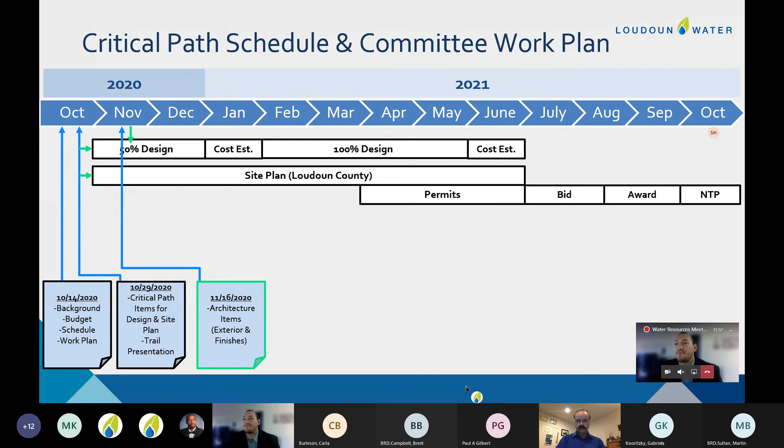And just recapping some committee decisions to date, this is our third meeting solely focused on the Reservoir Park project. At the first meeting in mid-October, we went over some of the budget and established the budget management principle and strategies moving forward.

The goal is to continue trying to bring the cost down wherever we can, without adjusting scope as best as possible. One of the strategies was the use of bid alternatives.

As we move forward pulling together the bid documents, we'll check in with the board on these bid alternatives. This will give us some flexibility after opening bids to make decisions depending on the cost.

At the next meeting, late October, we mainly reviewed some architectural items and opted to move forward with adding that bridge back in, over the small section of the reservoir, and also moving forward with the wood cladding and the stone water table. We'd like to include some bid alternates, just in case the cost comes in too high, giving us an option to bring it back down to the steel columns without the water table.

Stefan, Mr. Koblos has his hand up. Good morning, Stefan. Morning. Just a comment and a question.

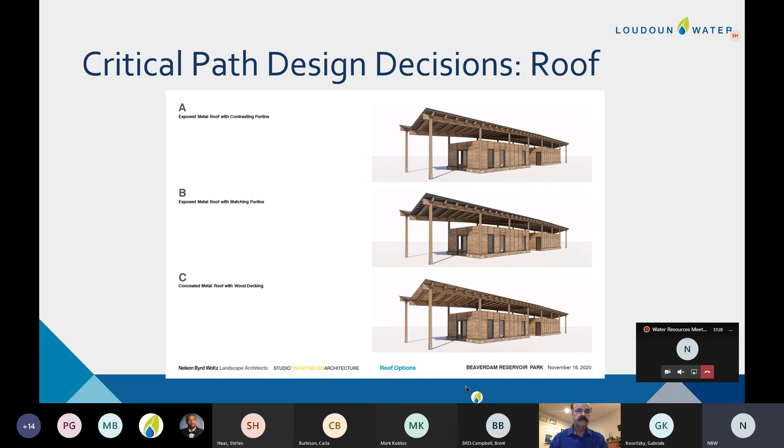Option C uses either a tongue and groove or some other kind of wood decking to completely conceal the underside of the roofing. That gives us the option to either stay with a metal roof or switch to a lower cost EPDM or membrane roof that isn't seen from the bottom or above.

So with that, we'll go to the next slide. So you see option A again - this is the most typical vernacular roof, where you see joists, purlins, and steel all exposed. There's a precedent image off to the left. We'll go to the next slide.

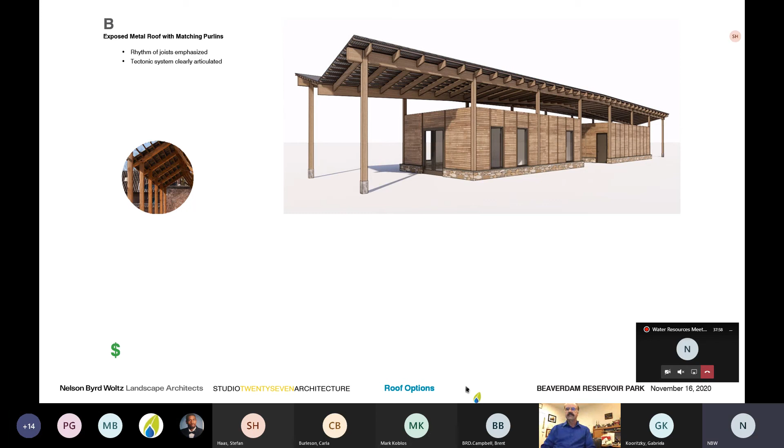Very similar to the first one, just with the purlins, which are what connect the steel roof to the joists, painted. We'll go to the next slide. This is probably the most drastic - it basically eliminates the purlins and replaces them with a wood decking that the roof is then fastened to. Obviously a different look from underneath, and you can see that in the precedent image to the left.

So those are the three slides that focus on the roof. We can circle back through any of these as necessary, but in an effort to keep things moving along, the next three slides look at siding for the volumes themselves.

Evan, I see we have a hand up. I'm not sure if Mr. Campbell had a question. Yes, I was just going to say I can't see any of the slides. I don't know if others can, but they're not on my screen. Paul, can you see the slides now? I can see the slides, plus I have them up on another monitor from the Word docs. I cannot see the slides. I'm able to see the slides. Paul, are you able to see them now? I cannot, but okay, maybe something on my end. We can all see the slides here.

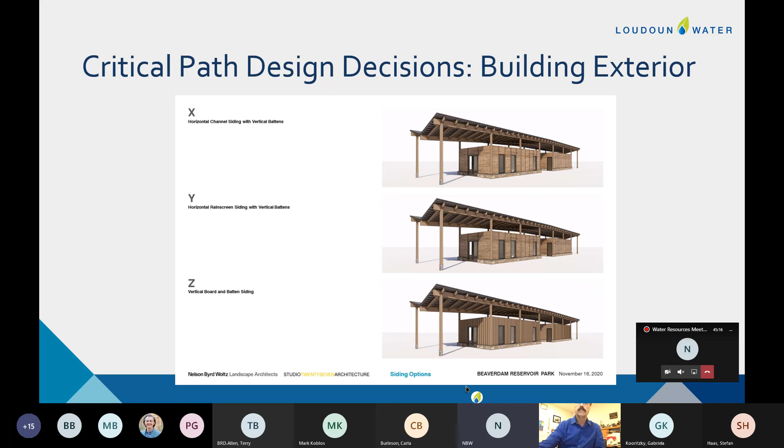If we go to the next slide, you can see, if it's not covered by the window on the bottom right-hand side, there's a section showing traditional framing, batt insulation, sheathing, a vapor barrier, and then the tongue and groove gets fastened directly to that in a very traditional way. We would hold them apart to allow for a little shadow line in between the boards, which you can see in the precedent image, so that it doesn't look monolithic and has some texture. People are probably fairly familiar with traditional tongue and groove.

If we go to the next slide, this is the rain screen option. It would use a similar type of wood, just without the tongue and groove profile. The boards are held away from each other, and there's also an air gap maintained between the exterior of the vapor barrier and the back of the siding. This allows moisture to ventilate, improves the longevity of the siding, and gives you a deeper shadow line between the boards since it's not continuous, giving it more texture. These are pretty traditional and kind of vernacular to the region, especially in smokehouses and corn cribs and things like that, so it's an adaptation of an earlier detail that we bring back.

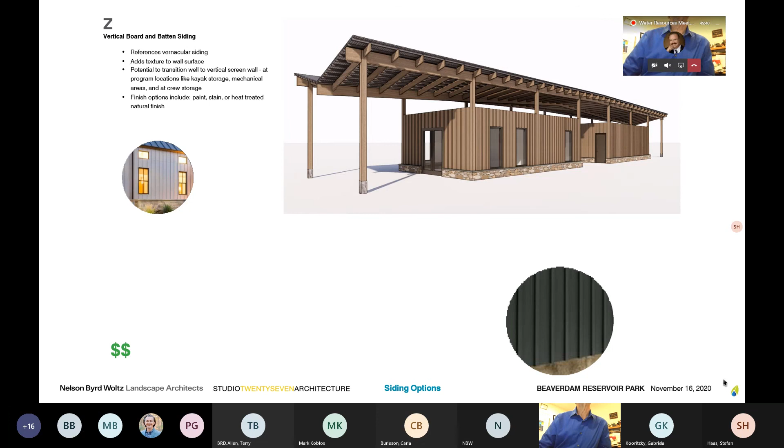So option X is the tongue and groove, right? Option X, yes, is the tongue and groove. Okay. Yep. And when they go together, there is no air gap between the back of the boards and the vapor seal for the interior of the building.

That's correct. So then that leads me to the questions about maintenance. Without having that kind of a close tight fit, the others, what are the maintenance issues about mud daubers, insects, other things getting behind that other lumber?

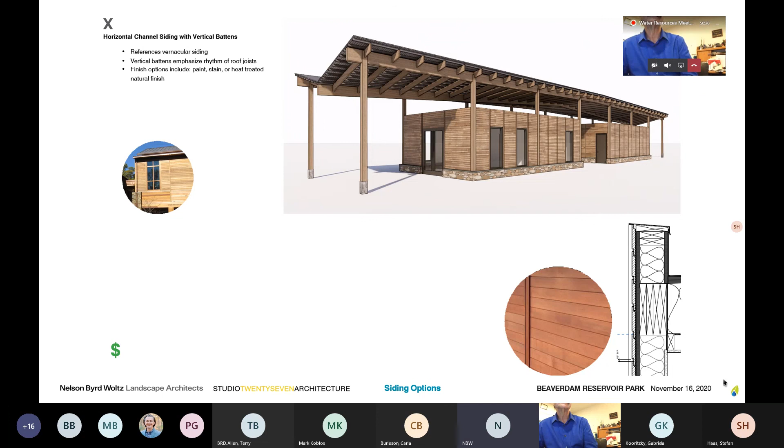The rain screen - so if we go to the next slide that shows that section, there would be a screen that gets mounted over the battens, over the furring strips and behind the horizontal planks. You wouldn't see it from the outside, but it would keep any kind of insects from moving back behind the screen.

While we're talking about the screen, it may be helpful to let you all know that on the restroom or welcome center structure itself, the far right hand end of the restroom is essentially an outdoor mechanical yard. There's a portion that is not enclosed from the top, but is screened from the sides, and that's where we have an outdoor unit for the air conditioning. There's an expansion tank and a couple other utility pieces there.

And one of the reasons we are proposing the rain screen option is that it would act as the siding even over that screened area, giving a bit of a continuous look, but it would also help our outdoor units and other utility pieces in that utility closet get a little bit better air movement. So that's another reason we're proposing the rain screen.

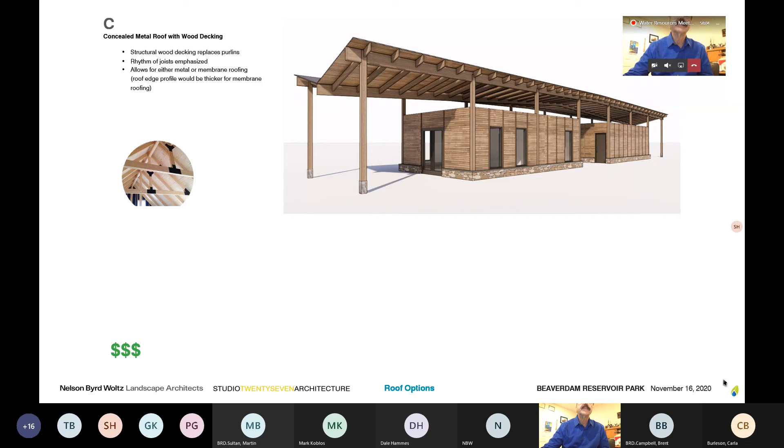I think one way to do it is that it doesn't look like anybody wants to go with Z, the vertical boards for the exterior, and that leaves two then. And on the roof, I think people have said the first option - let me go look at it - that would be A and B. So we've gotten somewhere, right? But we need to give some direction here. Can we get some agreement? Go ahead, Terry.

I'm fine with either of the metal roofs, and I'm fine with the corn cob crib - I forget the name of that. That's good, I like that. And I have no problem with deferring to what Nelson Byrd Woltz recommends and what staff recommends as far as these three go. I feel like I don't want to control everything. So that's where I am. Is it A and Y?

That's the range we're talking about. I'm fine with the middle one, which is Y for that. Do we have agreement on that? Yeah, I would agree. This is Marty. I would agree. Good.

When you're looking at A and B, is there any difference in expense, since on one of them you're painting the purlins and the other they're wood? Maybe Evan could talk about that difference. No, in that case they'd both be the same unpainted heat treated poplar or something similar.

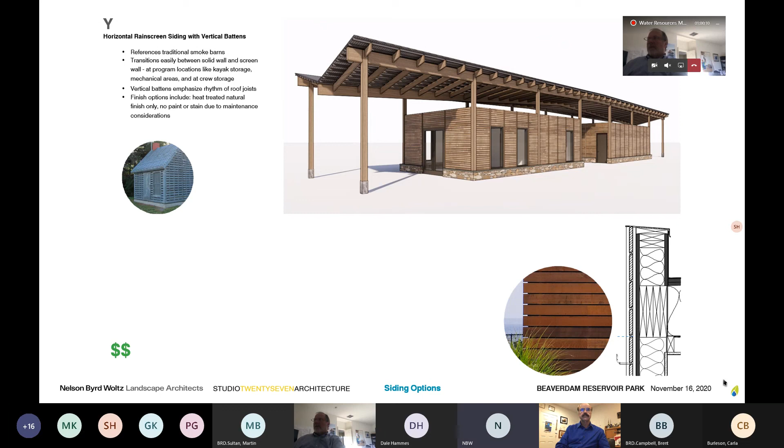What's your opinion, Evan, on whether you want the wood purlins or the painted metal ones? We would suggest wood, just given the setting and having a more natural, warm feel of it being in a park.

Okay, so that's A then. So we are talking about A and Y. It would be A or B would both be unpainted - only C, the vertical siding, was painted. Vertical, so I'm confused - A is the wood purlins, right? Yes, I'm sorry, yes, A is the unfinished, unpainted wood purlins.

And you prefer that over B? Correct. Okay, all right, so it sounds like A and rainscreen, A and Y, right? A and Y, okay. Good, all right. Do we need to take a vote or what?

I don't think a vote is necessary, Mr. Sultan. I think we will put this in the meeting summary, and Mr. Bonfils can report that out at the next board meeting. Okay, thank you. Yeah, I think A and Y is the direction that we're talking about going.

I think that's a good selection. We went around a lot of the maintenance issues. I happen to like tongue and groove, but that's just me. But A and Y seem to be, when you go with the pluses and minuses, a really good selection. So is that the direction you're looking for? That's very helpful, okay, very helpful.

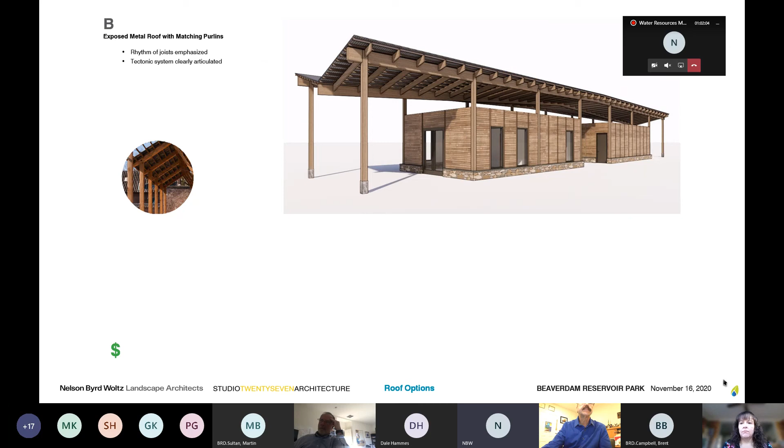Yeah, I have no problem with that. Yeah, I don't either - it's visually closing when you put it, at least in the picture we have. Are there any security issues going on that roof? Of course, over the visitor centers and restroom, that'll be closed. But the area with the maintenance - would there be any issues of people getting in there, potential theft, vandalism? No. Okay.

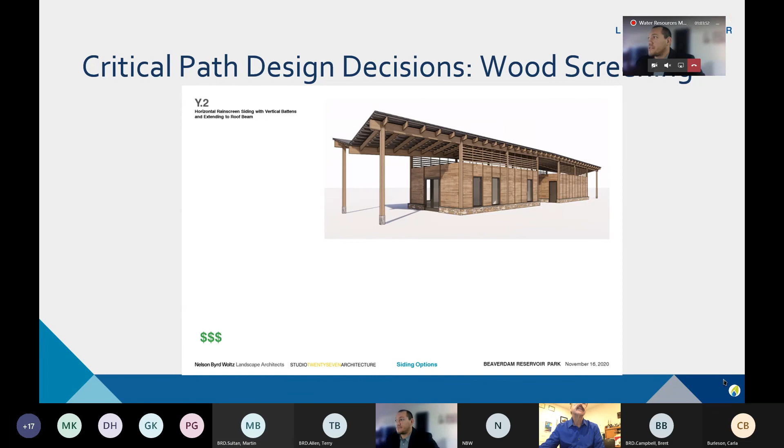And I think we're good. Great, well that concludes what we have. Excellent, so yeah, that was the bulk of today's focus for the presentation. All we really had left was just a quick look ahead about the next meeting. This is the last meeting for the year, at least for the Reservoir Park issues.

We're looking right now for our next meeting to be sometime January, February. Still trying to figure out exactly when that will take place, but the focus of that meeting will be education overview, and then we'll also look to bring you the cost estimate from the 50% construction documentation set, and we can go over that and look at where we stand with the budget.

Other than that, I think Sue wants to mention about the meetings moving forward. Yeah, good morning. Stefan, you pretty much covered it, but now that we've made significant progress on these decisions that keep us on the critical path, this committee can resume its more normal, regular quarterly meeting. And that's what we intend to do starting in January or February, depending on when we schedule the meeting.

As far as the Reservoir Park special project is concerned, as Stefan mentioned, the next meeting will cover the educational initiative - we'll have an update for you about that - and then also the cost estimate update. And then Pam will do a presentation on water quality or a supply topic to be determined. So I just wanted to mention that moving forward with the committee business.